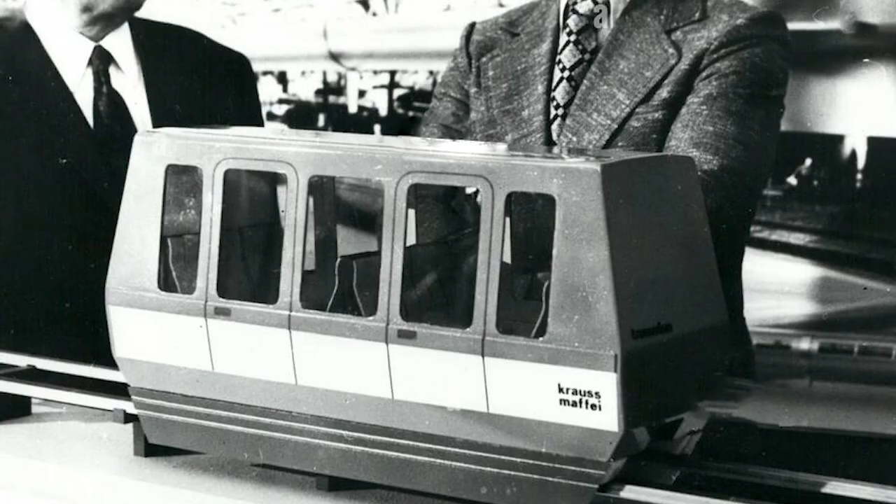This scenario somehow tells us that we, as proponents of PRT systems, have not been able to find a way to put our proposal into action. We have not been able to present a convincing argument with evidence that makes our proposals not only feasible, but desirable. Evidence that refutes all of our opponents' arguments, many of which have remained unchanged for over 70 years. What conclusions can we derive from this situation?

We need to stop using the same old rhetoric of one solution that will solve all of humanity's mobility problems, and instead present a solution that provides a range of reasonable benefits at a reasonable cost.

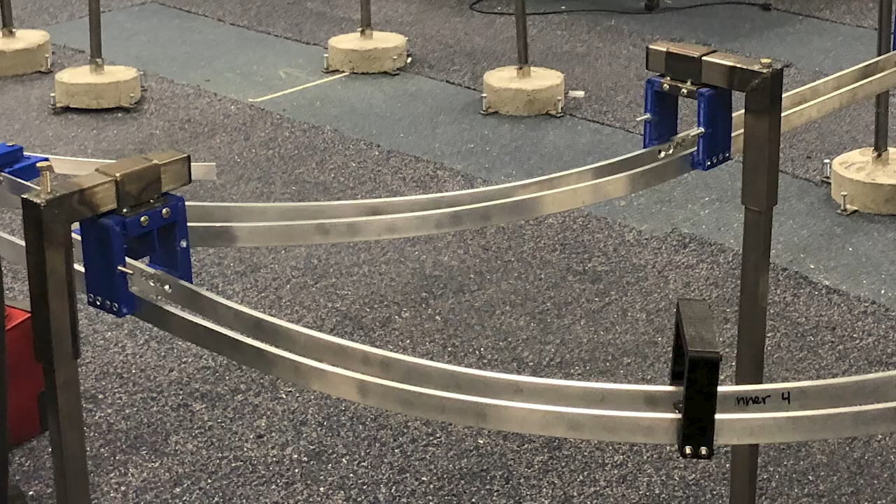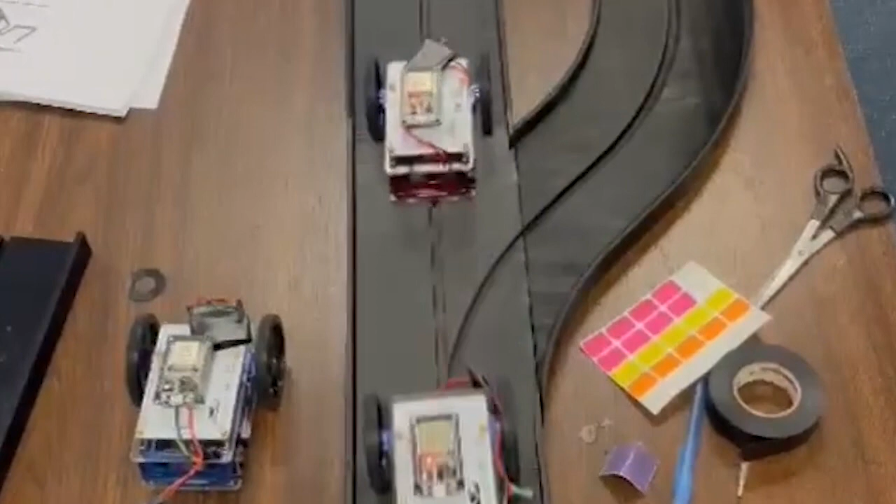Taking the first step is always the hardest. At Spartan Superway, we are working on what we consider to be the cornerstone of the entire system. We're working to develop a control system that will safely and efficiently operate a network of as many pod cars as needed, traveling along a guideway that can reach multiple destinations without requiring additional last-mile trips.

This control system is based primarily on the work of California-based company Transit Control Solutions, led by engineer Eugene Nishinaga, as well as the work of our in-house engineering team, full of talent and creative impulse. Nishinaga and his team have developed control systems for various transportation projects, such as the BART system that currently serves people in Northern California and connects the San Francisco Peninsula with communities in the East Bay and South Bay.

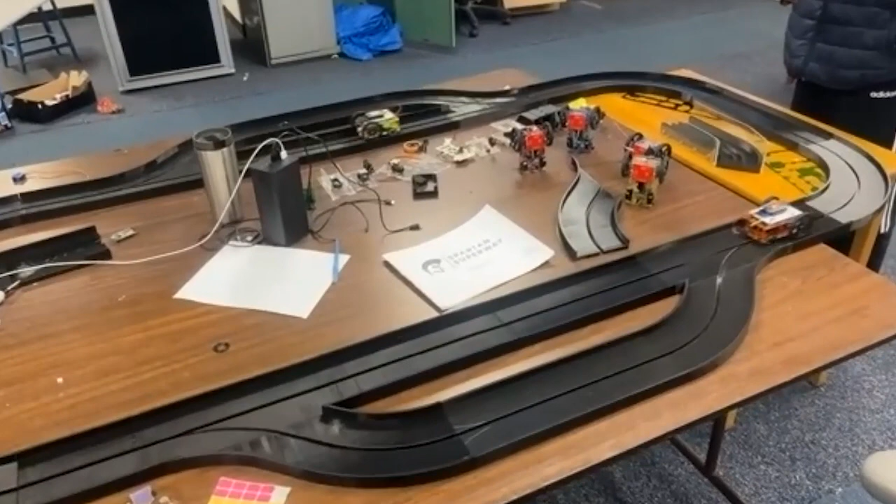The joint project between TCS and Spartan Superway aims to test progressively more complex versions of the control system on scale tracks and vehicles. The scale models we're using provide valuable information about how the system works, with multiple actors and factors in play, which would not be possible using a full-scale version of the system.

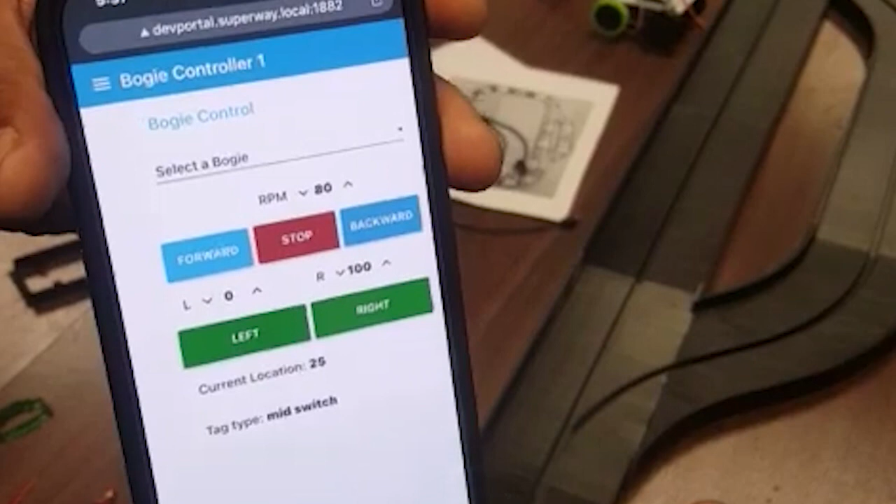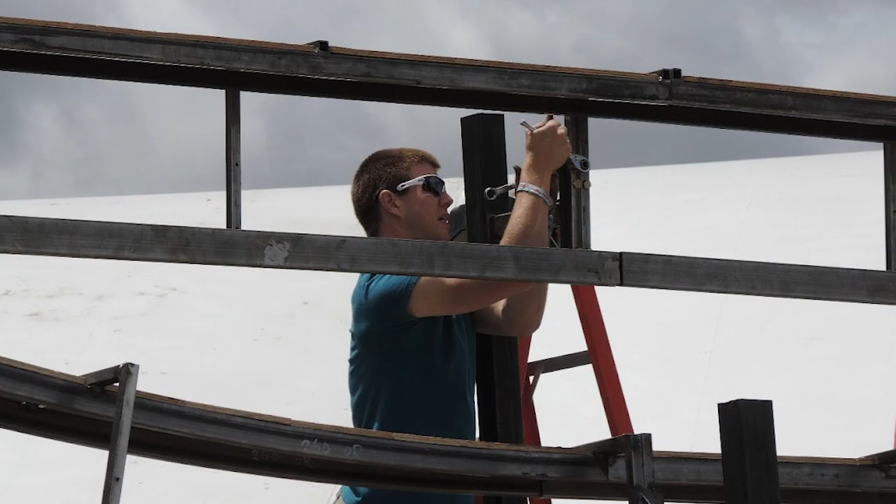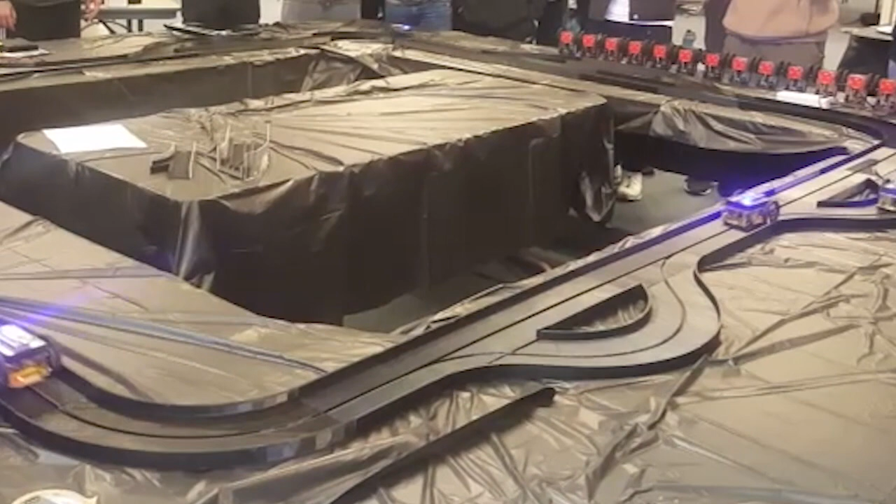Only after we are confident that our main control system is robust enough to provide an efficient, reliable, and safe service despite all possible occurrences, can we begin to consider other important design factors such as weight tolerance, speed limits, material durability, etc. The idea is to make the operating scenarios as complicated as possible, with variables, contingencies, and other factors to test how the control system would react to all these situations it will encounter in real life.

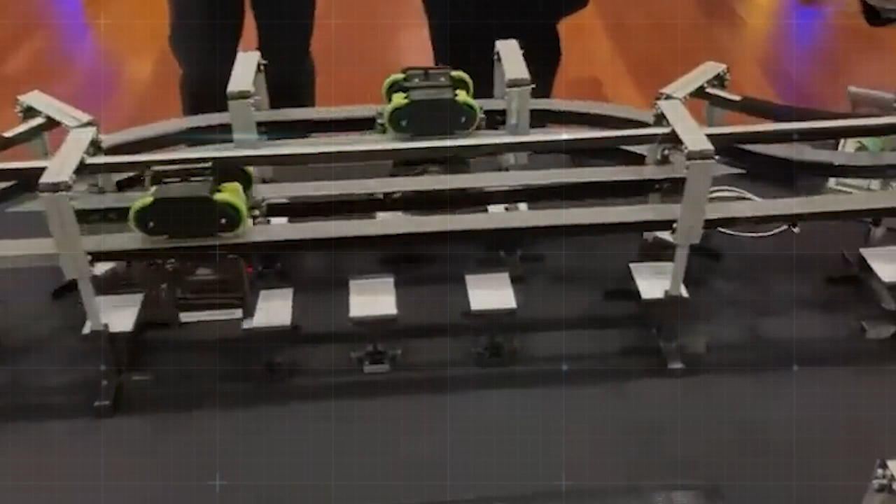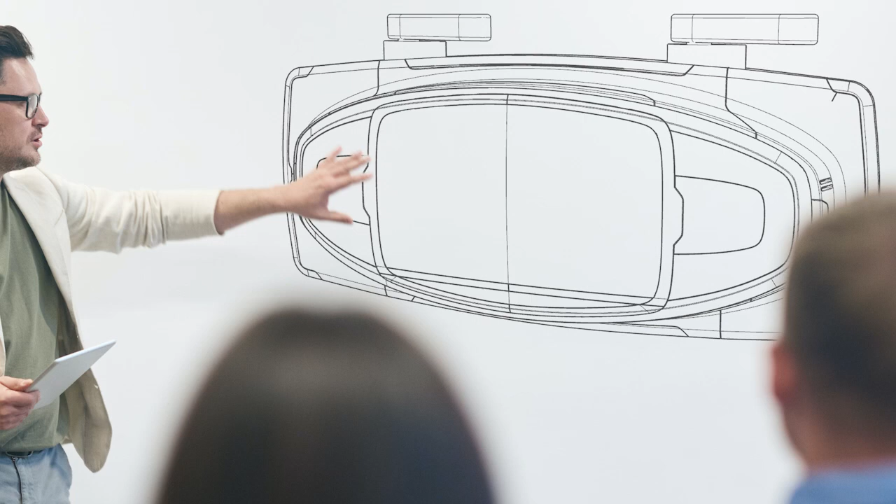Furthermore, we cannot start visualizing a user experience journey until we are sure that the user will actually be able to input his traveling instructions into the system and that it will respond with an appropriate response to those needs. Therefore, it is of utmost importance to accelerate this phase as much as possible, because much of the future progress of this initiative depends on the positive outcome of our efforts to create a reliable, robust, and secure control system.

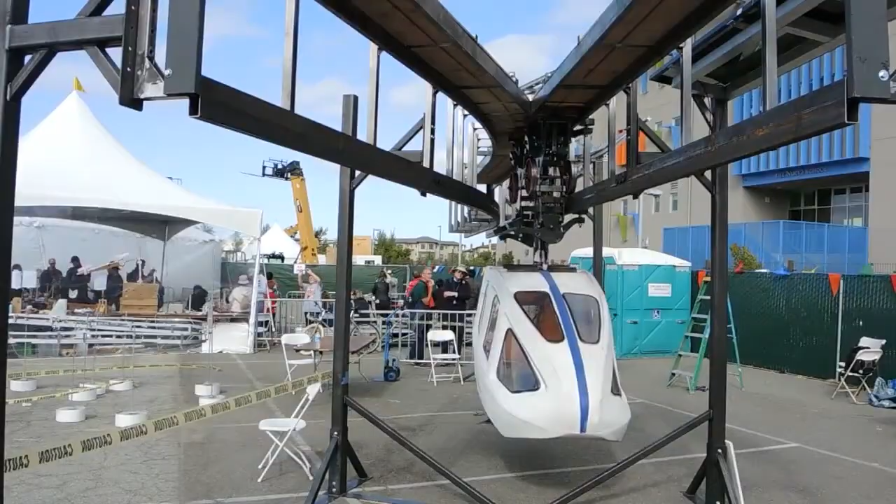Our current testing phase will demonstrate that the system is capable of handling its basic operational scenarios, which when transferred to a full-scale, fully functional system, are expected to save significant time and money.

After years of talking to public officials and reading research papers and articles about public transit, we have been able to narrow down all of the concerns and doubts people have about PRT systems to three main factors. If a PRT system is to be a solution, it must address these three factors effectively. We call them the three big S's of public transportation, which are scalability, sustainability, and safety.

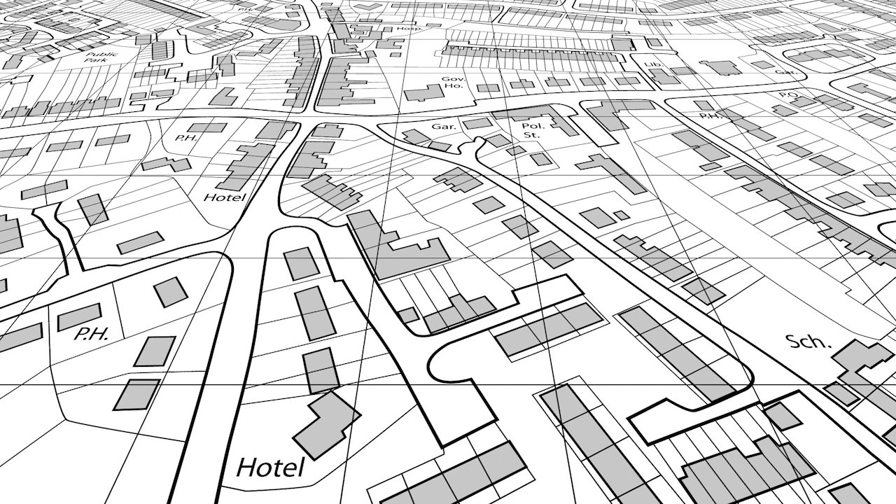Both in the literature and in our own experience, we have found that the governments that have shown interest in implementing a PRT system in their cities have all expressed concerns about the scalability of such systems. This is because the few examples of PRT systems in operation today are only capable of traveling in a loop, in a circular fashion, and are not capable of reaching any destinations other than those that are already within that loop.

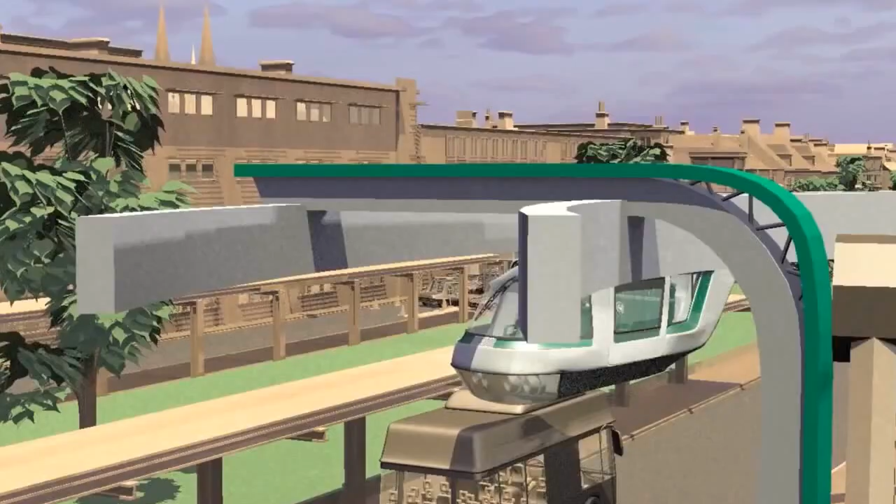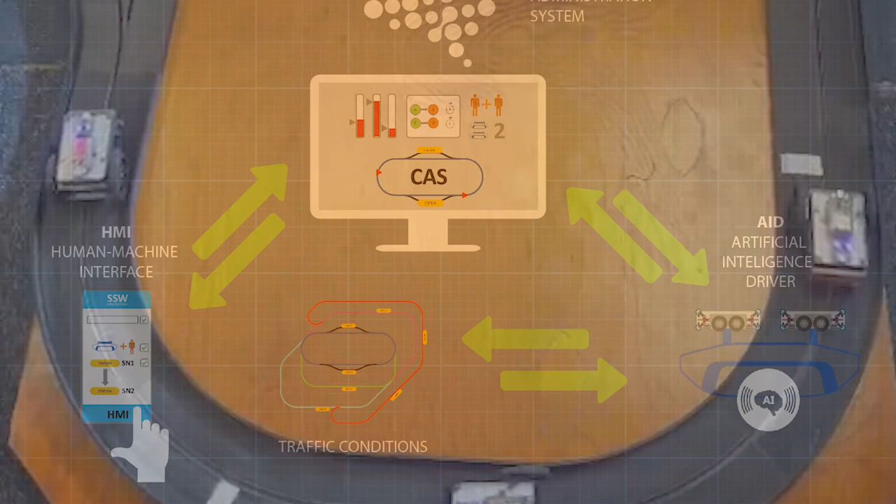In order to grow beyond the loop, not only do the guideways need to be branched out and more stations built, but control software is also needed that is capable of managing the traffic situation when many vehicles are traveling on the guideways at the same time.

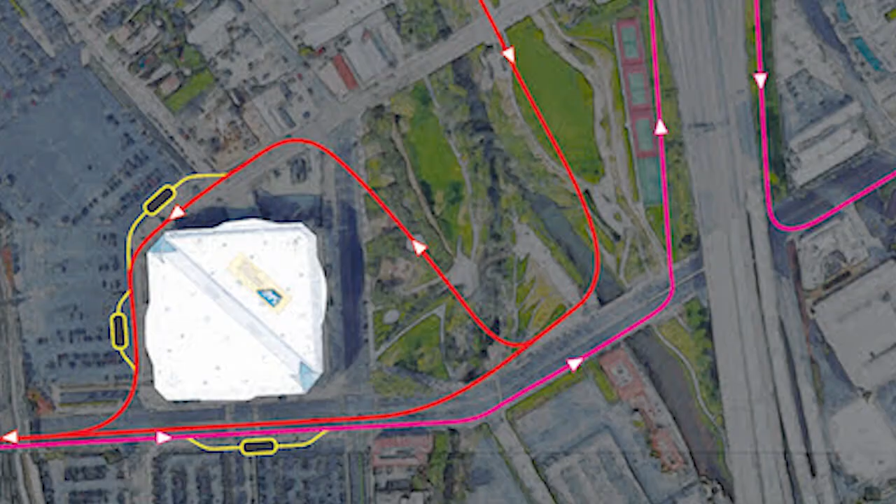Now, in 2023, we're not ready yet to build a metropolitan PRT system that covers the area of an entire city. First, we must narrow it down to smaller communities where a train station or airport can be connected to the rest of the community by a PRT system that can provide point-to-point service currently only provided by cabs or Uber-like services.

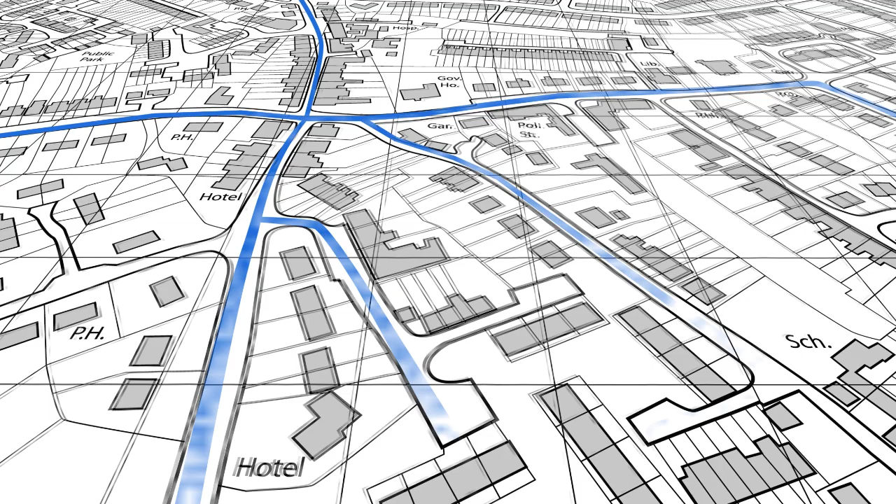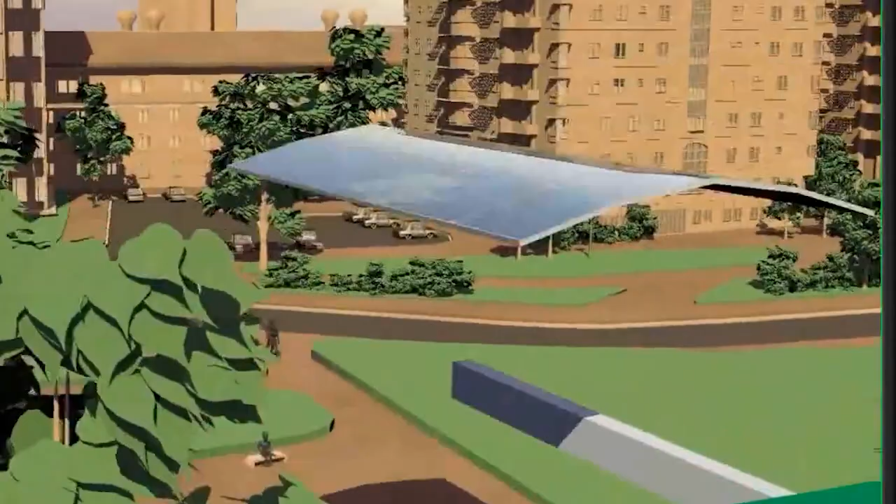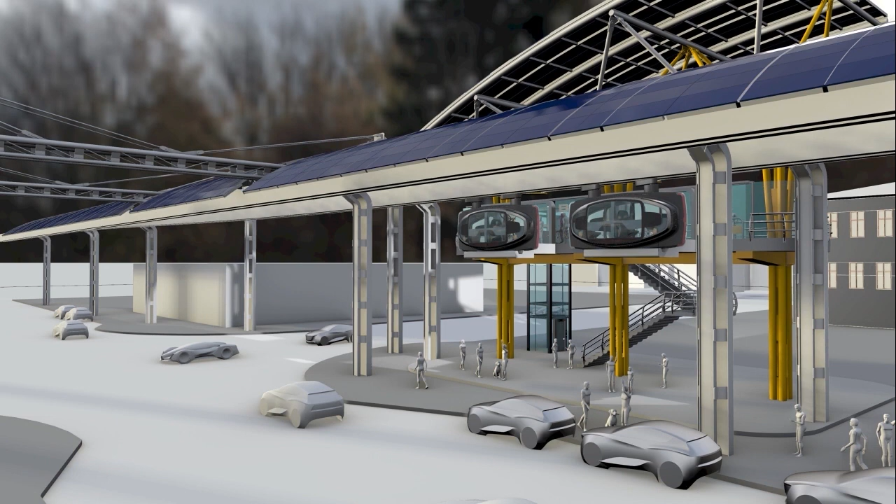In addition, and most importantly, local communities need to be assured that if they choose to build a PRT system for their city, it will have the ability to expand and connect with neighboring PRT systems. This approach envisions incremental investments in local PRT systems that can later be connected to neighboring systems to form a larger network. This means the control system must be able to handle the traffic of all these vehicles entering and leaving several stations at optimum speed.

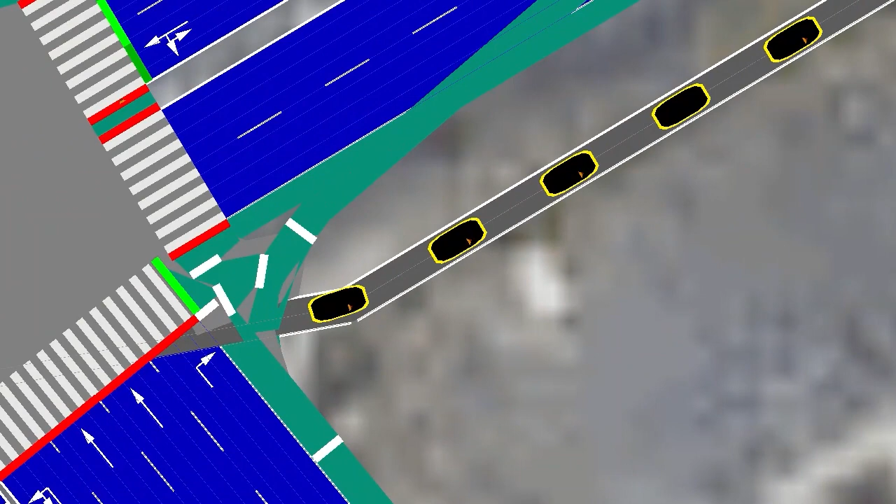So, in order to talk about scalability, we first need to demonstrate that our control system is capable of handling a high density of travel at high speeds.

So far, the TCS team has run a series of computer simulations that allow them to assess the performance of their software. Now, however, we're taking the next step and testing the performance of the control software on a scale model track with up to 20 vehicles running around, whose actual physical components must now interact with the control software and respond accordingly to the instructions given.

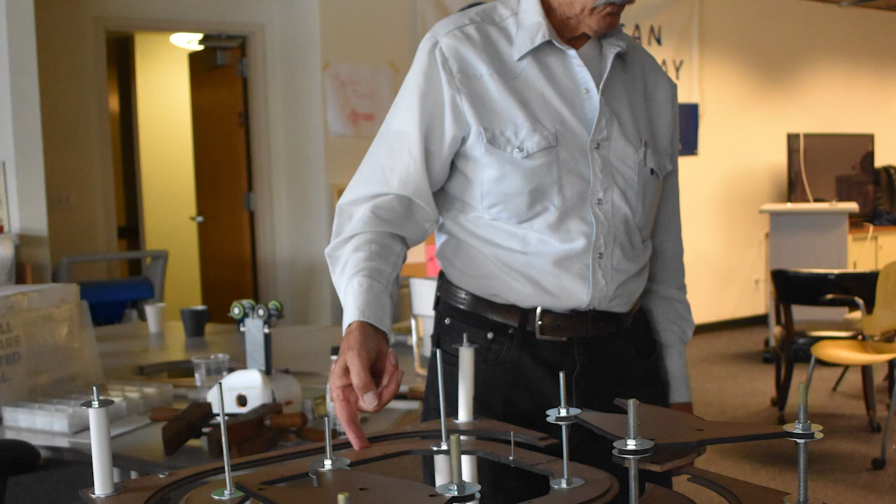It is critical to do this type of testing on scale models because it would simply be too expensive to build a track large enough to test 20 or more full-size vehicles at the same time, which is exactly what you need to get a proper idea of what the control system can do.

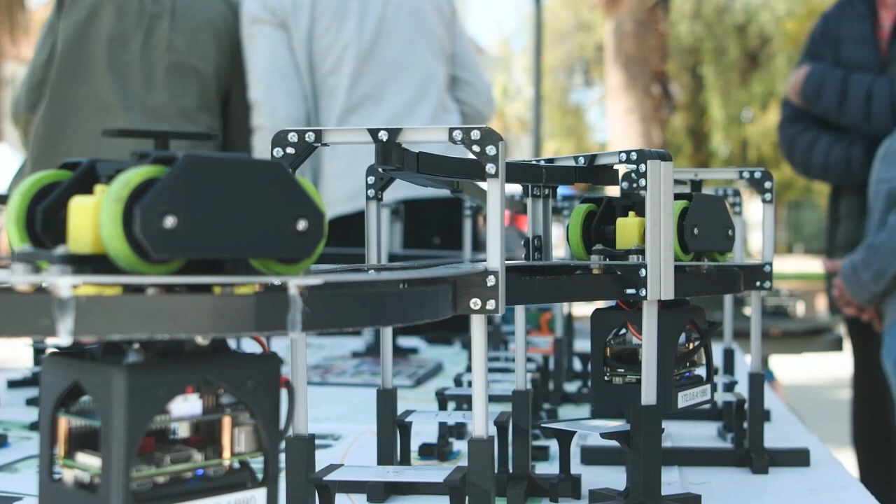Another reason for running tests on a smaller scale is that we can make the scenarios as complicated as necessary to test the capabilities of the control system in different circumstances.

A very important aspect that can be achieved with our control system is a distance of 1 second separation between cars traveling at a speed of 100 kilometers per hour.

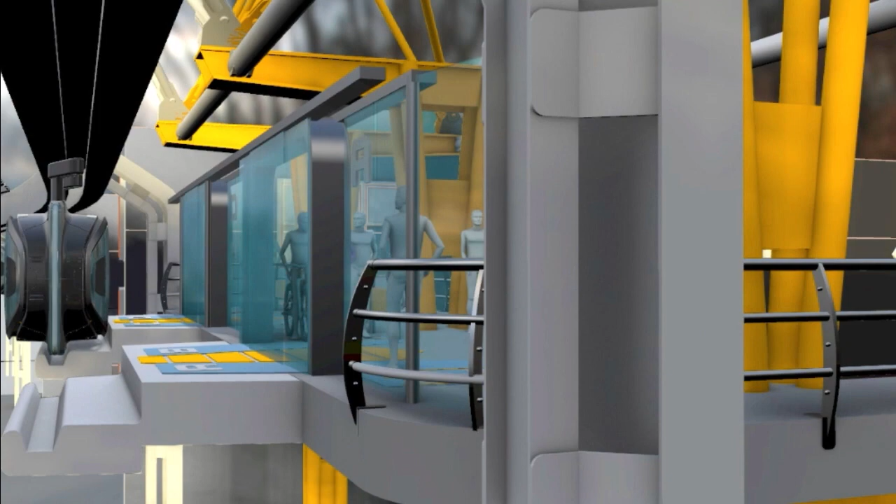This is a speed that allows us to be competitive with other current means of transportation, such as light railroads, that have to stop at every intermediate station, while one of our pods can reach its destination without any stops or interruptions at a more or less constant speed. In addition to the ability to allow vehicles to travel at high speeds with a minimum of spacing between them, the high volume of traffic at intersections must also be managed.

The high volume of traffic at intersections must also be managed.

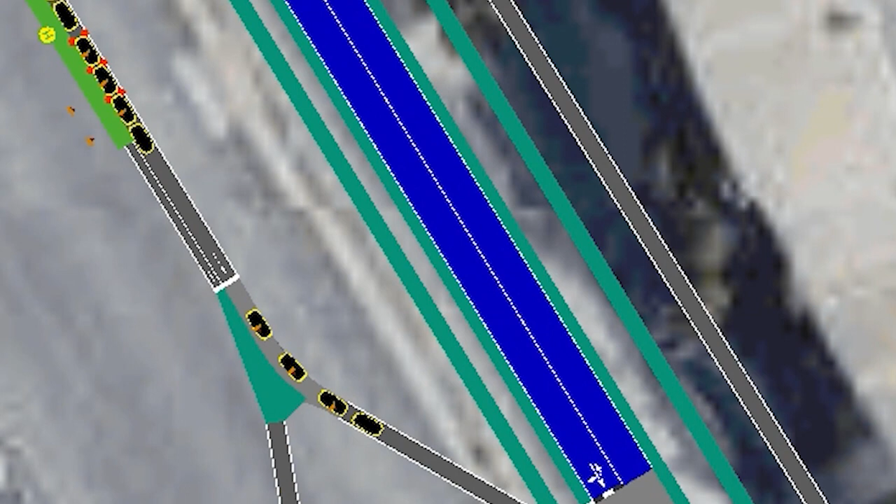Our control software is able to coordinate the movement of fleets of vehicles coming from different directions and entering an intersection. They arrive at exactly the right time, at the right speed, so that the flow of traffic at these points is uninterrupted. This is another factor that the control software must handle efficiently for the entire system to provide good service. One of the things we are testing with the scale models is precisely how we can manage intersections efficiently.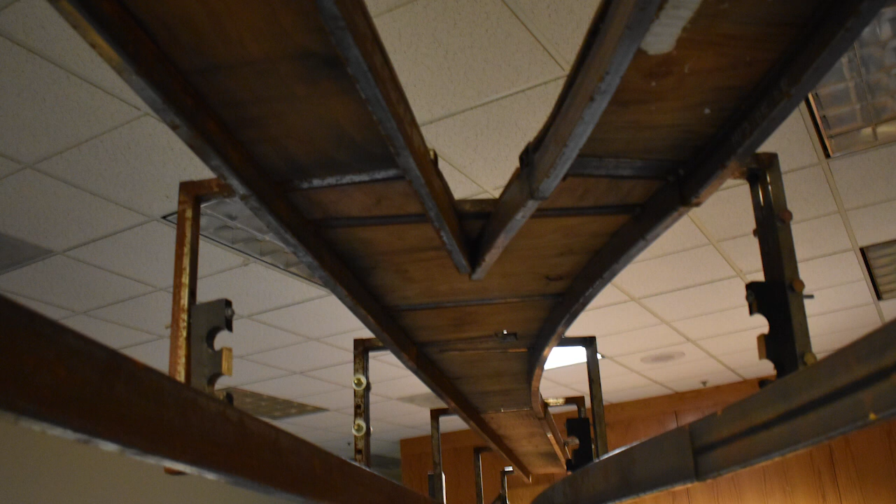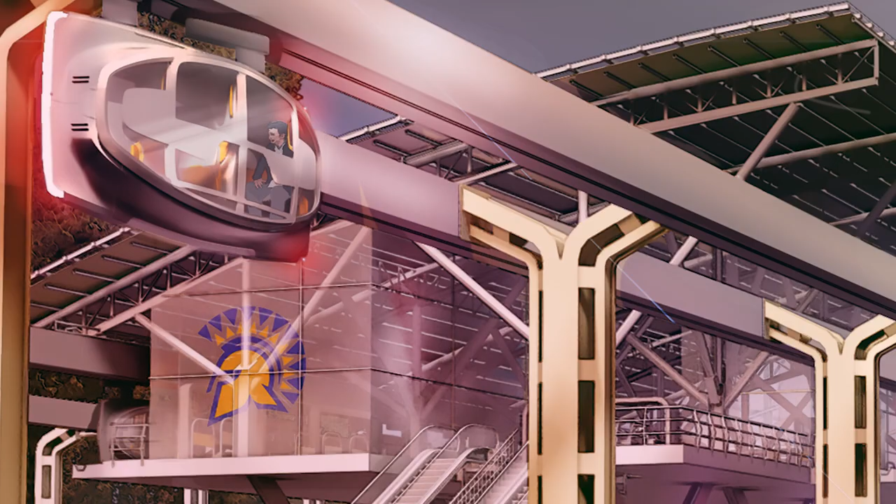After years of research into the economics of public transportation, we can safely say that a PRT system is much more sustainable than other modes of transportation in terms of energy consumption, simply because our small individual vehicles can carry the same number of people as a large train, without having to stop at every station.

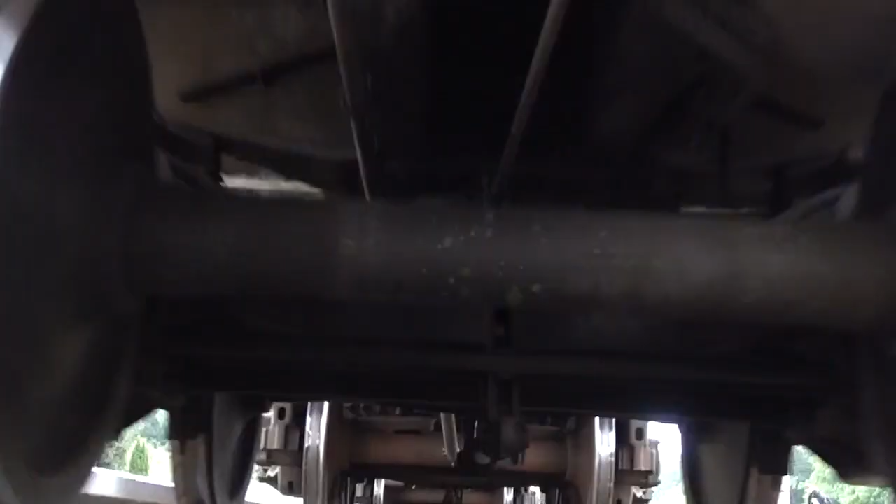Which means that every time this happens, we need to use a large amount of energy to get the train moving again at a speed of 60 miles per hour. It takes about 10 megawatts to accelerate a 1 million pound, 700 feet long train to reach mainline speed.

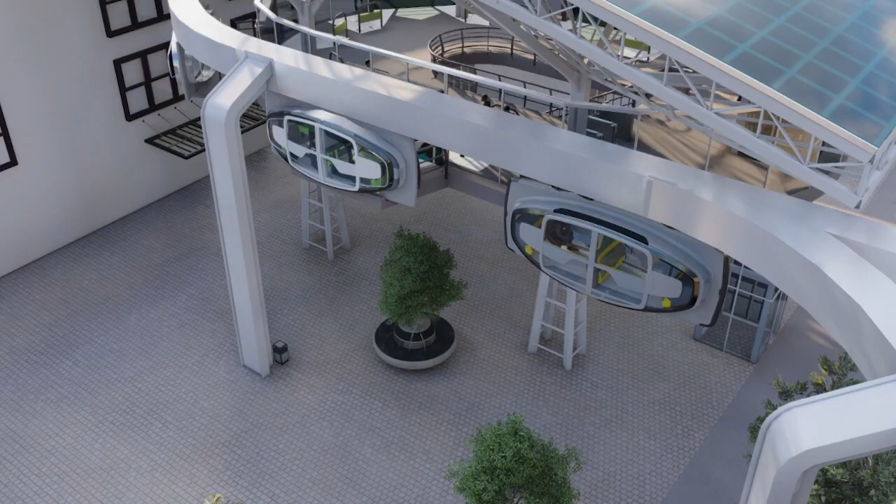The SolarSkyways stations gather 1 or 2 megawatts from their adjacent solar arrays during the day. That's quite enough to accelerate 5,000-pound vehicles from a standstill at 50 to 100 kilowatts to 60 miles per hour for a short time, and then only a few tens of kilowatts at running speed. By storing daytime surplus, we generate enough to power our entire system day and night with clean, renewable energy sources.

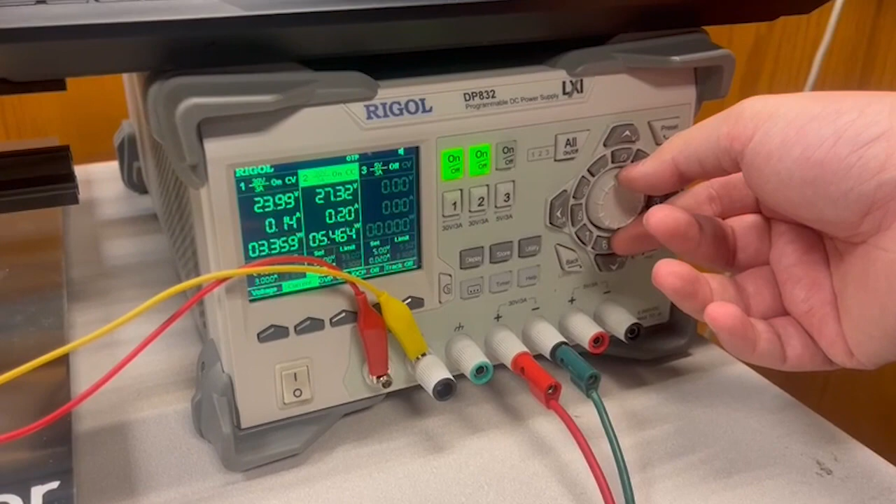One of the challenges in developing a control system is that it must be proven to be absolutely safe. There are many methods and techniques to design a complex electronic system to meet the safety specifications set by government institutions.

Engineer Jin Nishinaga has been involved in the development of control systems for several very important projects, such as the Bay Area Rapid Transit System, or BART, and the first PRT system ever implemented in Morgantown, West Virginia. Nishinaga is combining the various techniques he has learned from these projects and designing a whole new set of parameters suitable for the conditions of what SolarSkyways is currently creating.

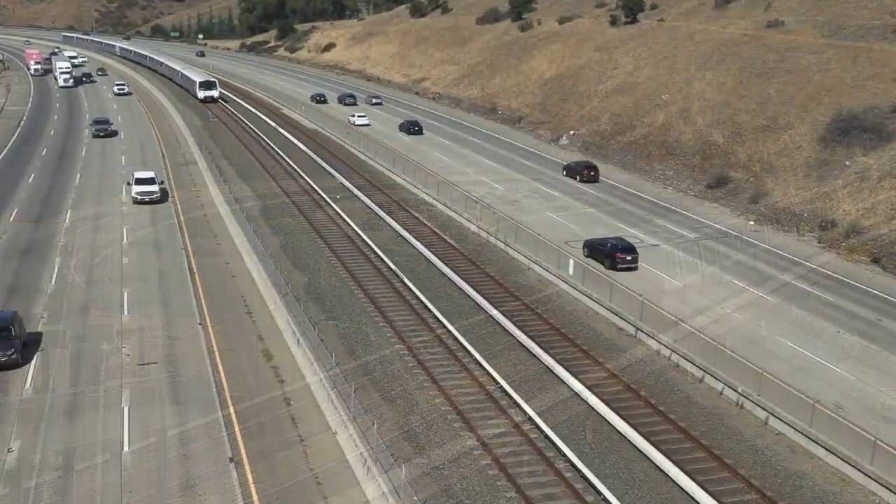In the past, at the time when the BART system was being built, in order to be called safe, a control system had to prove it was capable of operating with a mean time between unsafe failures of at least 250,000 hours.

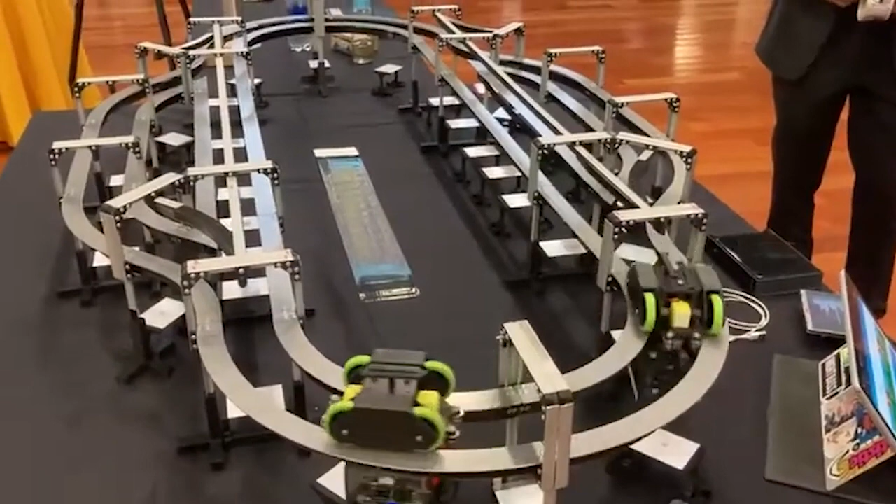Now we are developing the next generation of control systems, which must have a mean time between unsafe failures in the order of 10 to the 9th hours. You have to use a lot of special techniques and methods to achieve this level of safety.

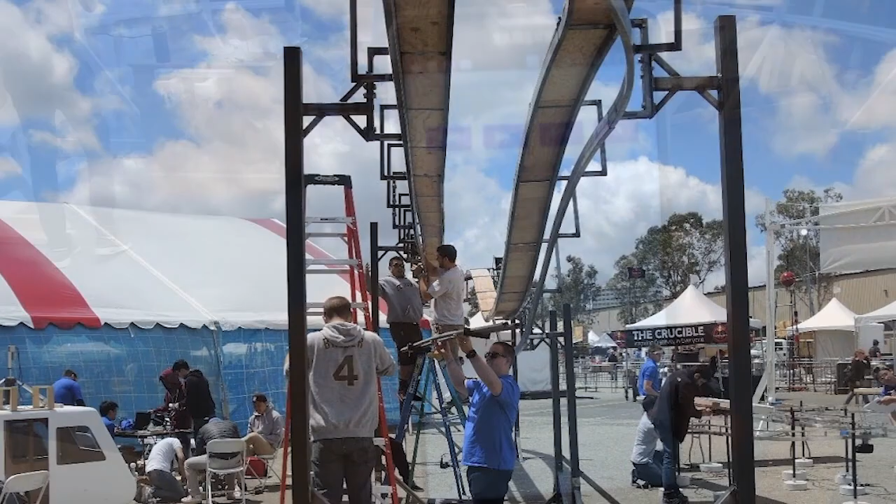None of this work would have been possible had it not been for the fact that SolarSkyways is made up of a group of talented professionals. This video is mainly about the development of the control system, but in parallel we are also working on the design of the guideway and the bogie. We have come to the conclusion that these three components must function perfectly before any of the potential benefits of the overall concept can become a reality.

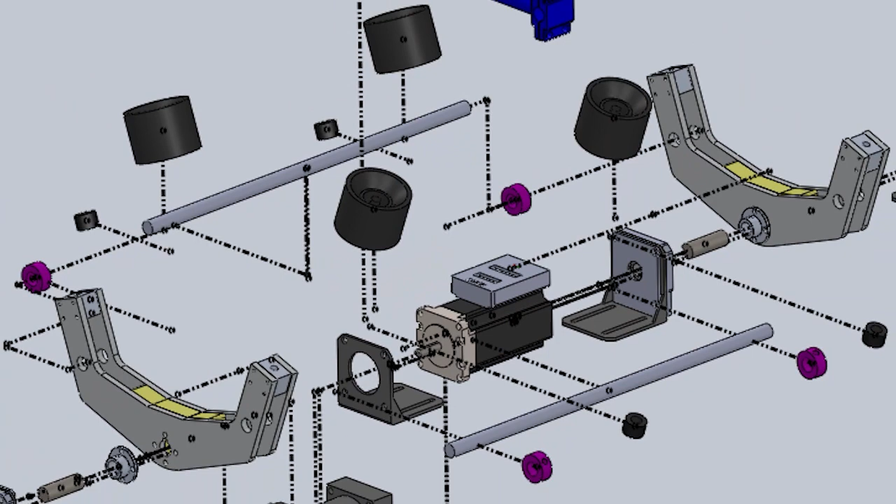SolarSkyways' priority is to create intellectual property based on the primary goal of developing these three components.

Ron Svensson, the founder of SolarSkyways, knew that this goal required a special kind of leadership and an entirely new way of organizing and planning. That is why Jorge Rodriguez from Toluca, Mexico, an outstanding industrial designer and design theorist, was entrusted with the management of this project.

Jorge has a unique talent for quickly understanding the needs of a project and building teams around them. With his design firm, Rothsmass, he recruits specialists from all over the world, depending on what the project requires.

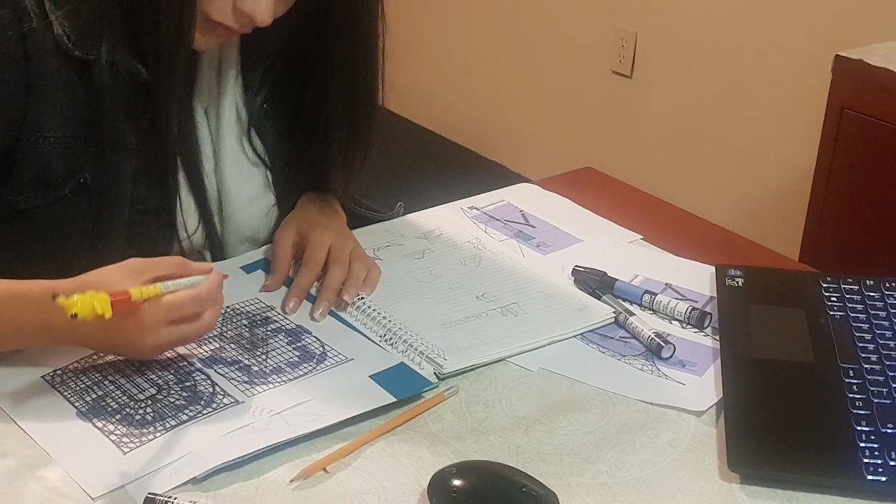In this particular case, industrial designer Gabriela Sanchez was brought in because she has a unique combination of skills with her background in industrial design and her current work as a marketing coordinator for various clients. She was tasked with coordinating the creation of a solid brand image to communicate the team's accomplishments in a visually strong and clear way.

Mario Cruz is a Mexican industrial design master's graduate from the University of Cincinnati who has been working with Rothsmass and SolarSkyways since 2018. He has been able to utilize several of the design understanding tools he developed with Jorge Rodriguez to fully understand the project and its complex requirements so that no loose ends are left, and decisive and informed action can be taken.

Jorge Rodriguez uses his team to constantly review the needs of the project and find the right way to fulfill them. He also creates different types of communication material to keep our investors, supporters, and the general public informed about the progress of the project.

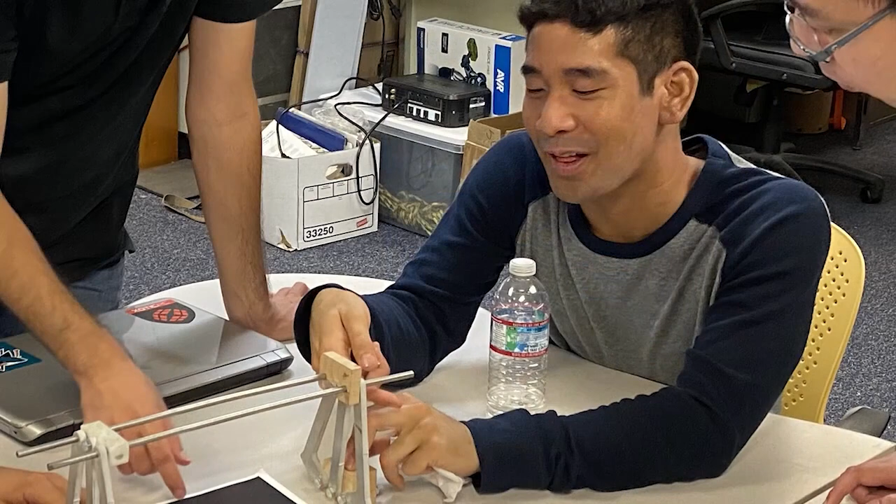To give shape to the newly formed organization, an executive team was formed, consisting of Ron Svensson, Dr. Furman, Jorge Rodriguez, and the recently added and highly valued engineer, Jin Nishinaga.

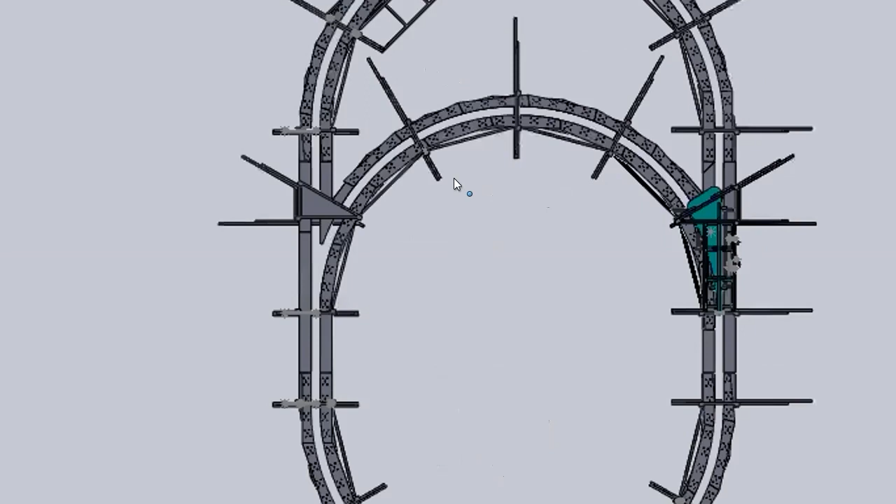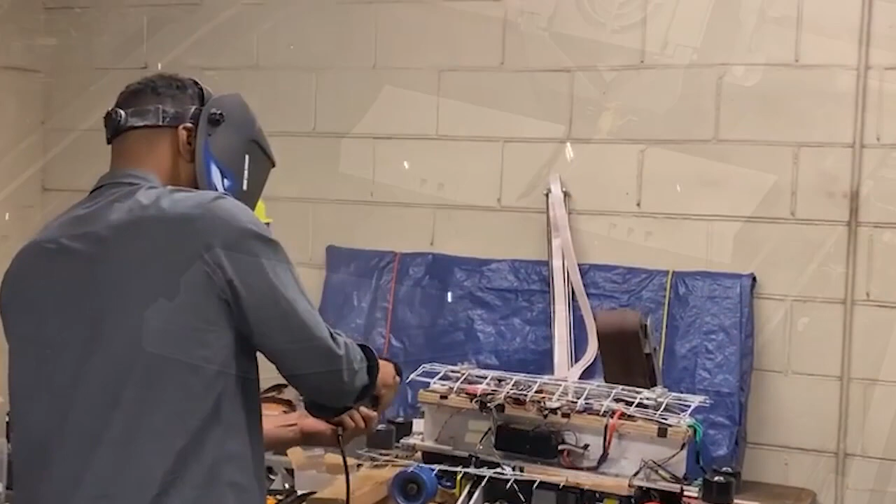The executive team has begun planning and designing various test tracks at different scales. However, planning the manufacture of the parts required for these tests and coordinating all the technical decisions made by the executive team is the responsibility of our engineering project manager, Gregory White.

Greg is a mechanical engineer graduate from San Jose State University. His talent and leadership skills have come in handy in leading a team of engineers whose primary goal is to build a scale test track and program its navigation control software to demonstrate the basic operating principles of the three components we have been talking about.

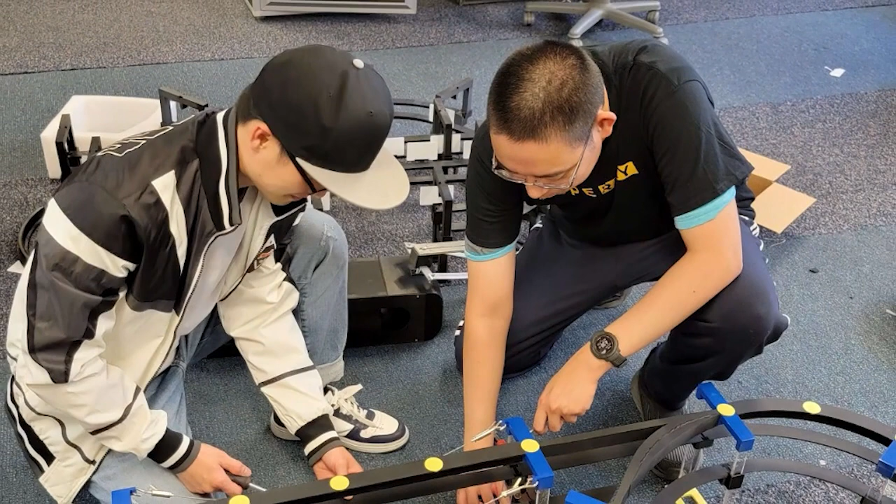Greg is joined by Khoa Lam, a software engineer also from San Jose State University, who has become an integral part of our organization because of his unique problem-solving skills. He leads the programming and the navigation control software, along with his colleague, Carlos Ortega, also a software engineer from San Jose State University, whose talent and enthusiasm has been instrumental in helping us accomplish important goals, one step at a time.

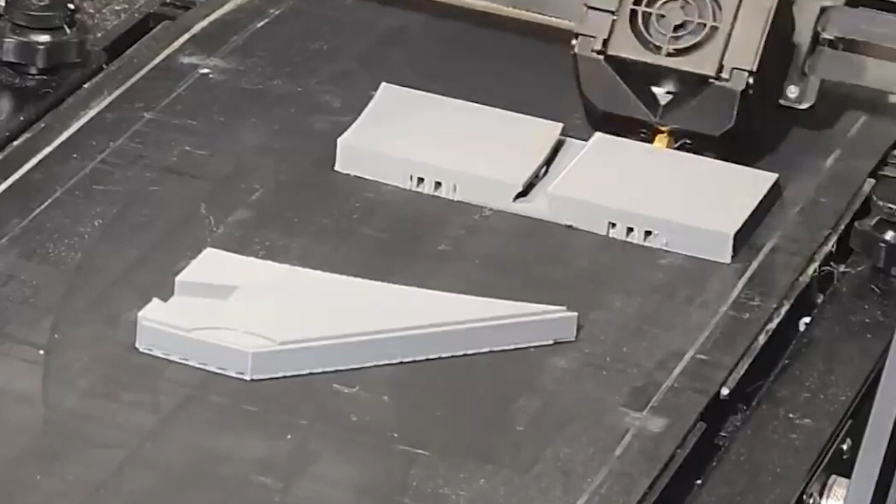Finally, mechanical engineer Nya Nguyen, another great asset from San Jose State University, is the latest addition to the so-called core team. He has overseen the construction of intricate designs that must meet stringent performance standards, even at the prototype stage. These four talented engineers form our core team.

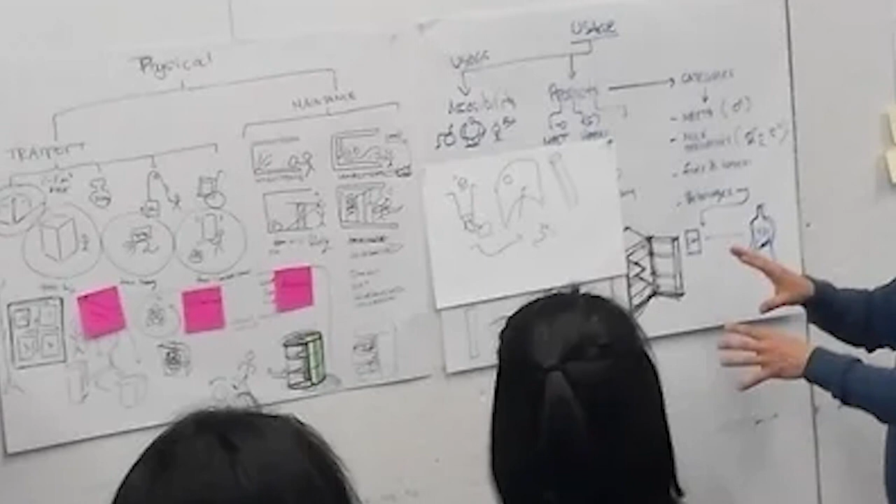Jorge is the coordinator between these different teams in this layout. He listens to the specific needs of the teams and must provide them with action paths and tools to help them achieve their specific goals and ultimately advance the entire organization.

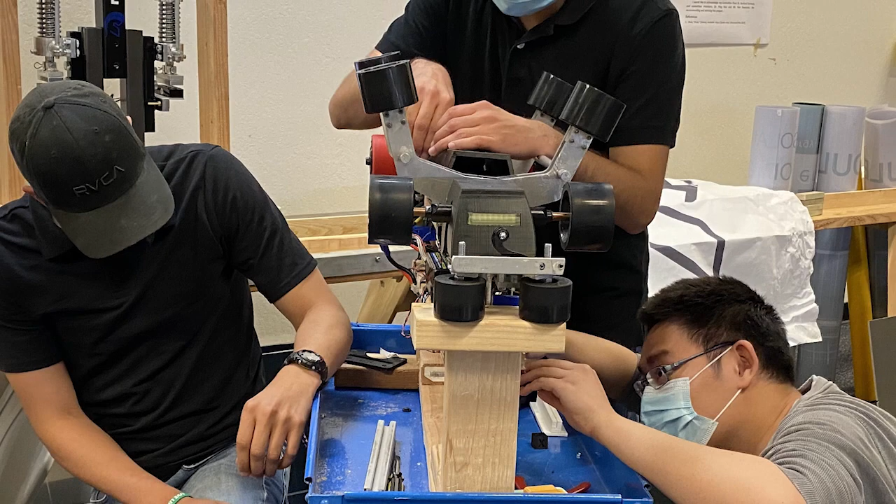SolarSkyways is working to develop new intellectual property that is critical to the development of any autonomous transportation system. We have the skills, the discipline, and the people to achieve many great things that will have a positive impact by revolutionizing urban transport.

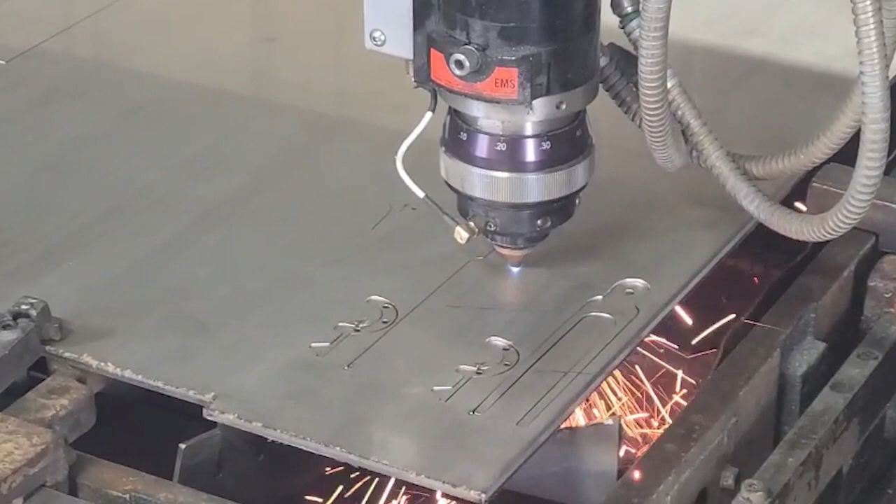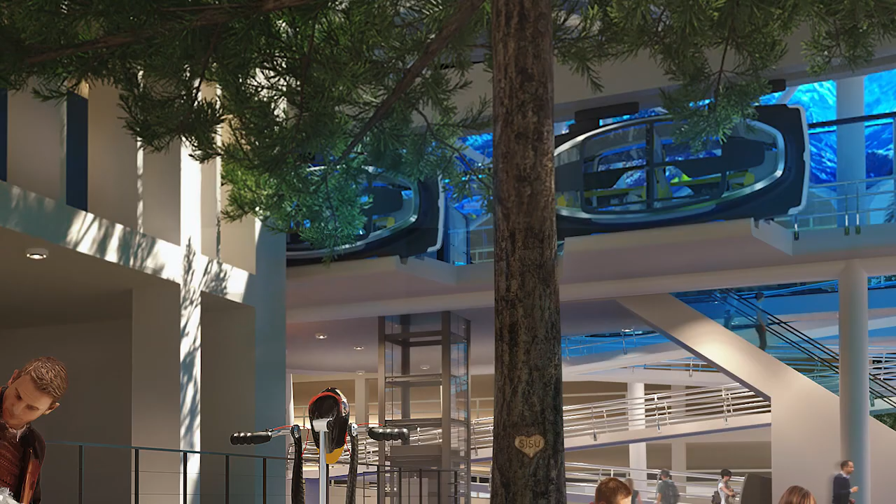Providing key technological and design elements and creating new efficient, sustainable, and convenient travel options aimed at reducing congestion, emissions, and air pollution. This new version of an old concept can improve the quality of life of people and contribute to a greener and more technologically advanced urban environment.